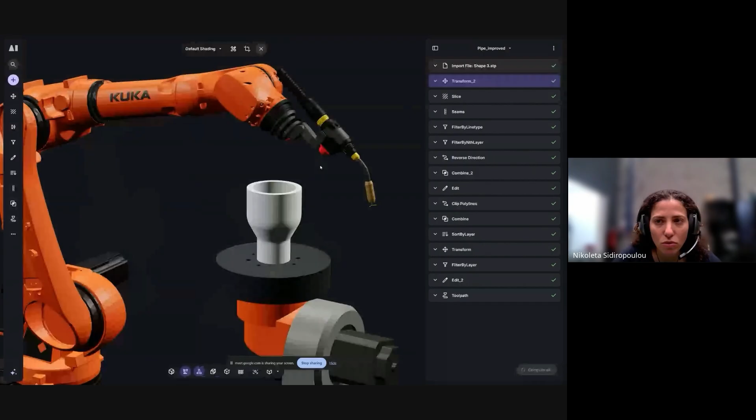Okay. Can you explain to us a little bit? You don't need to go through every operator, but just click and show us what you do where. Sure. So I import my file and I place it where I want to have it. So you can see it here. The next step is to slice it. Inside the slice operator, I use the revolve function, which is the new one.

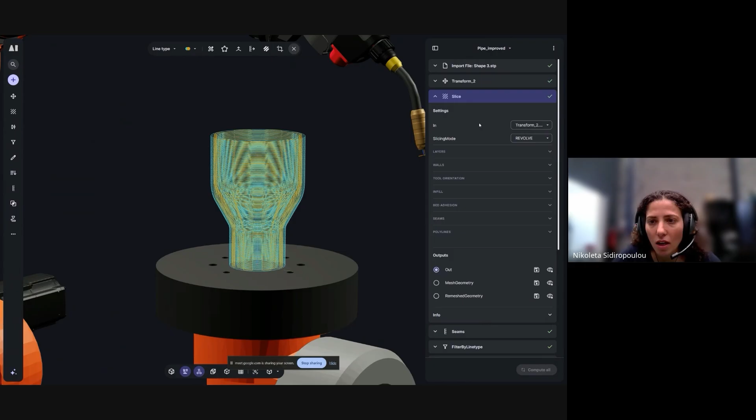And this function has also the possibility to have ribs. That is mostly for strengthening the part and to have a better structural performance. At the same time, ribs are creating air gaps in between that really help with the thermal performance of the part.

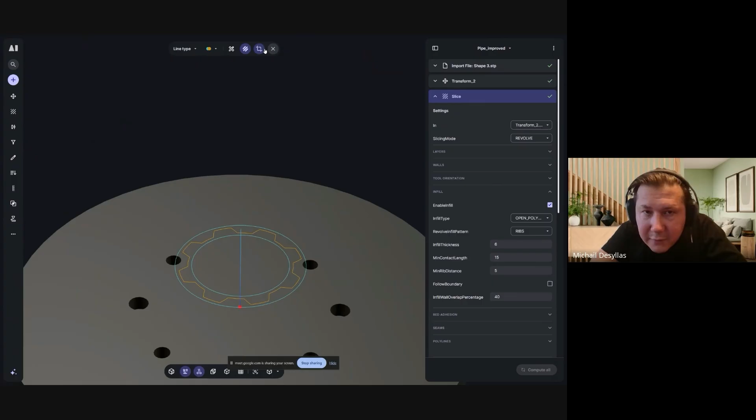And I've seen under the ribs, you also have more options like weaving. Ribs, yes. So concentric. Revolve can have like concentric infill and also weaving for complete dense parts. Okay, perfect, very nice.

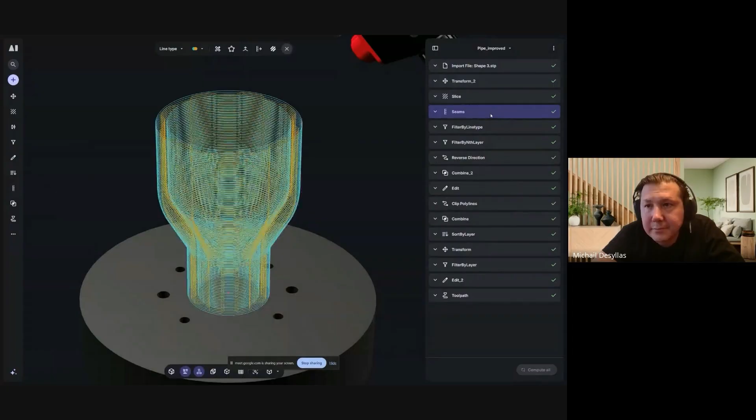And yeah, once I have done this, I organize my seams. And for example, what I like doing in WAAM is to reverse my seams. Where are the seams? Let me activate them. So okay. I don't like them to be on top of each other.

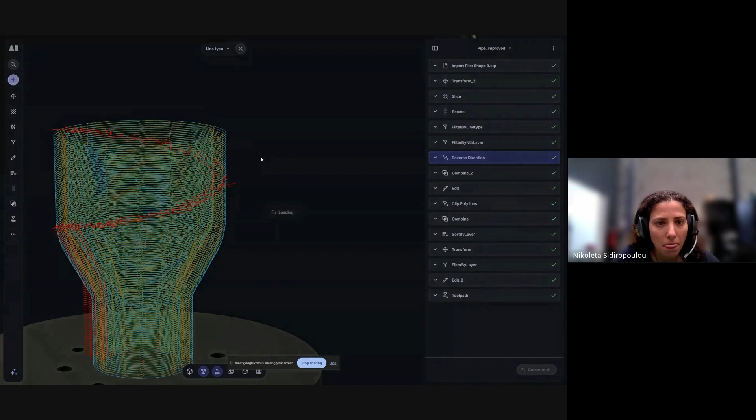And also another thing that I like doing in WAAM is reversing the direction of every second layer. I see. So it goes clockwise, counterclockwise. Exactly. To let it cool, right? Yes, it lets it cool and it helps a lot with the thermal management.

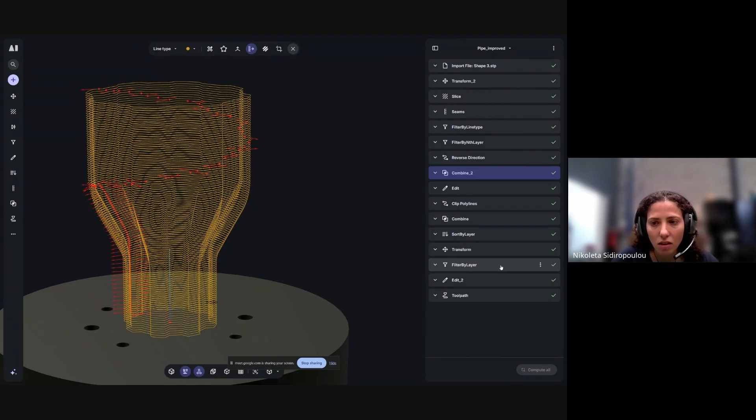And the rest of the things are like very minor things. I would say it's mostly sorting the polylines. So in the end, I filter, and I also have to move it a bit up because usually on metals you print on top of a plate, so you don't print directly on your bed. And then that's the final toolpath, and I import it in the toolpath operator, where we can control more processing parameters.

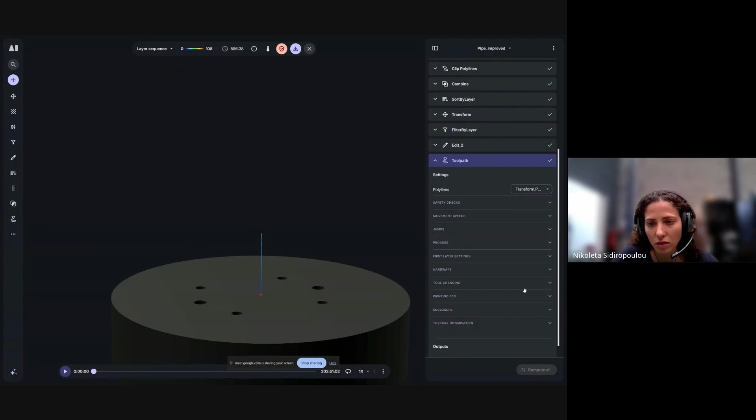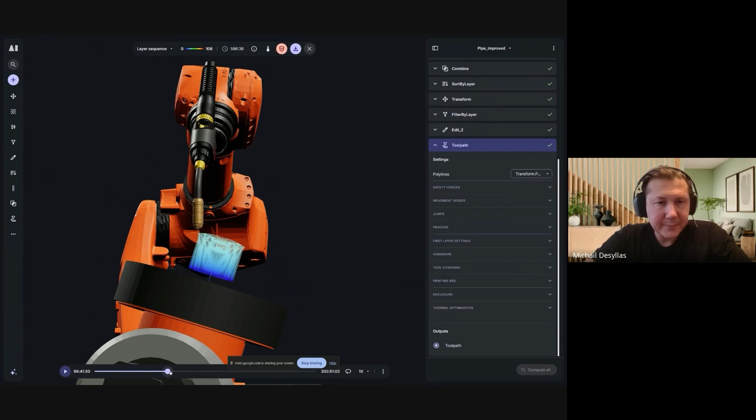Can we see the simulation? Sure. So this is straight. We keep the extruder straight. Oh no, we are also moving the. Yeah, we are inclining the bed, so we try to keep the extruder vertical, which is very important for printing. So one axis is rotating this way, and the other axis is rotating in a rotary way, so that we get the prints that we would like to have.

I've seen you added some extra operators here and there after you have done the main slicing and the seams. What are you using when you are sorting? What's the reason for sorting certain areas, for example? You want to have control at the start, or why are you creating these kinds of operators over there?

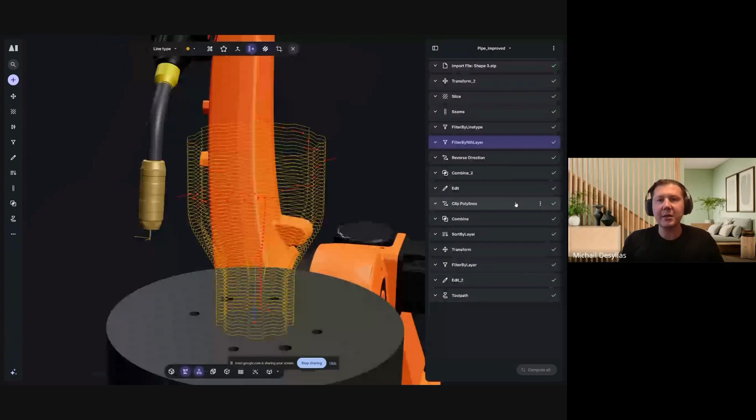So in the beginning, I isolated based on line type. I wanted to process the ribs so that they have a different direction. And the thing is that when you combine it together, you want to sort it again by layer.

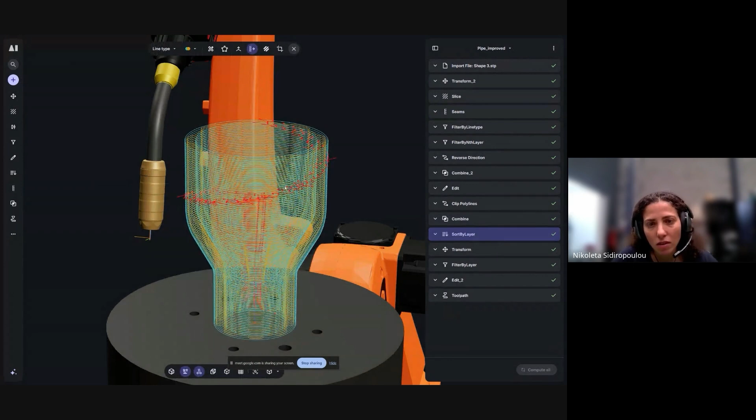I see. So the line type we define in the software as, let's say, one line type is the outer wall, the other line type is the ribs or weave. And then in each of these line types, which is a geometrical strategy, let's say, you apply different ways you want to print it, sorting it in the direction you want the printer to move, right?

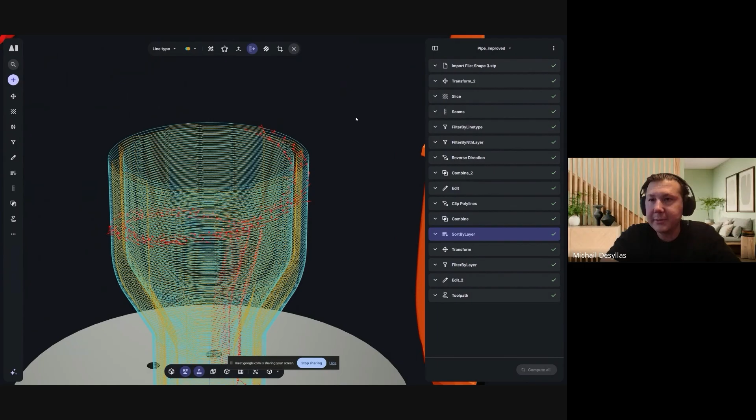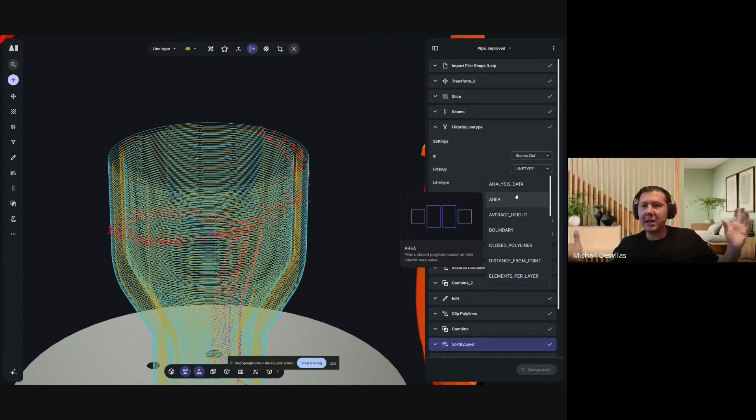Exactly. So it's very common, many times people want to isolate specific areas of the print. They can use line types, or they can use the area; if it's a closed polyline, they can isolate the boundaries. So we have a lot of filter options. Okay. So we use the filter as an operator to take the inner or outer ones, take them out and then treat them locally. Yeah, treat them locally differently.

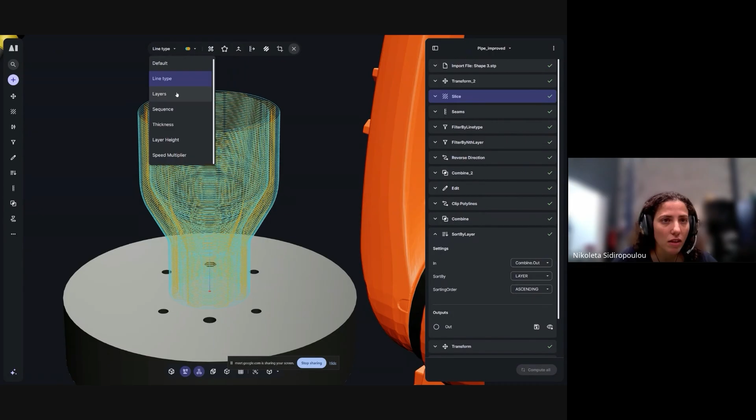And when someone is combining them together, then he prefers also to do a sort by layer again to get the proper order. So in our software, when the polylines get sliced in the slice operator, they have data which is called layers, and this is a number that is assigned to them. And this allows you, anytime you isolate something and process it, to sort it again by layer numbers, and then you have your toolpath as you would like to have it.